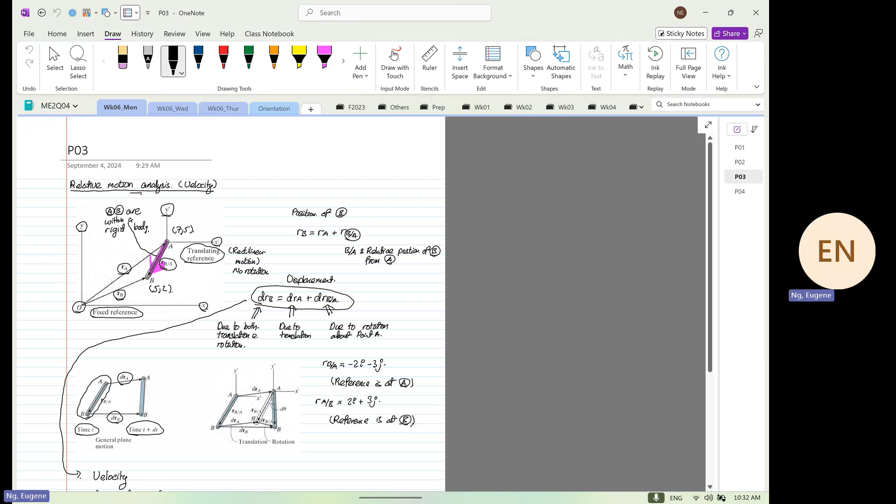So this is week, not for week 6, and on a Wednesday, and we are going to look into relative motion analysis, and we are going to focus on velocity first.

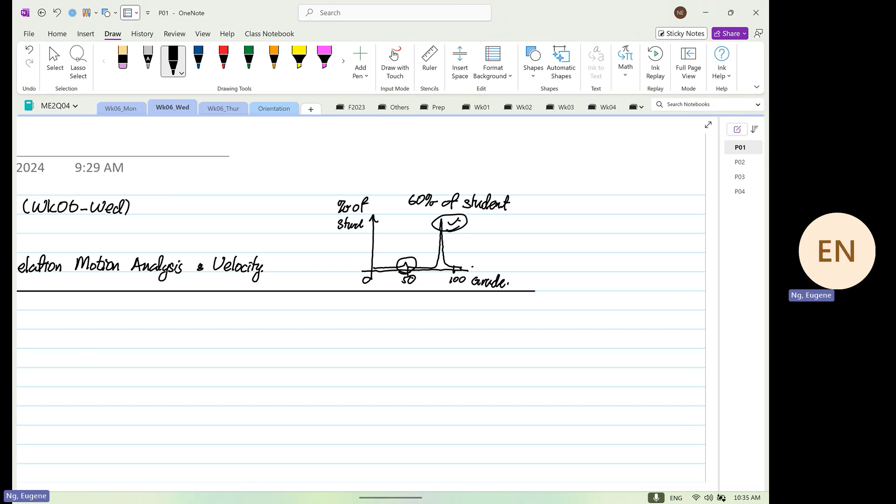Are we clear? Okay, then 3A, you will tend to like me more, or not 3A. Whenever I go outside and walk, I have to look behind my back because 3A has a very high failure rate. Are we clear? Okay, I'm worried. Okay, not worried, but I'm being paid. I'm being paid a good salary to do two things. So I do two things. Anyone? I'm being paid a good salary so that my courses are life-changing and life-shortening. Are we clear? Life-shortening.

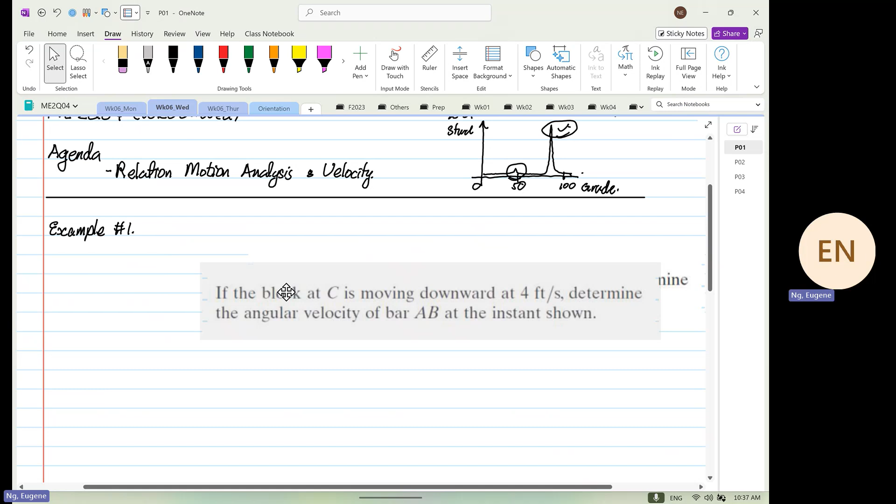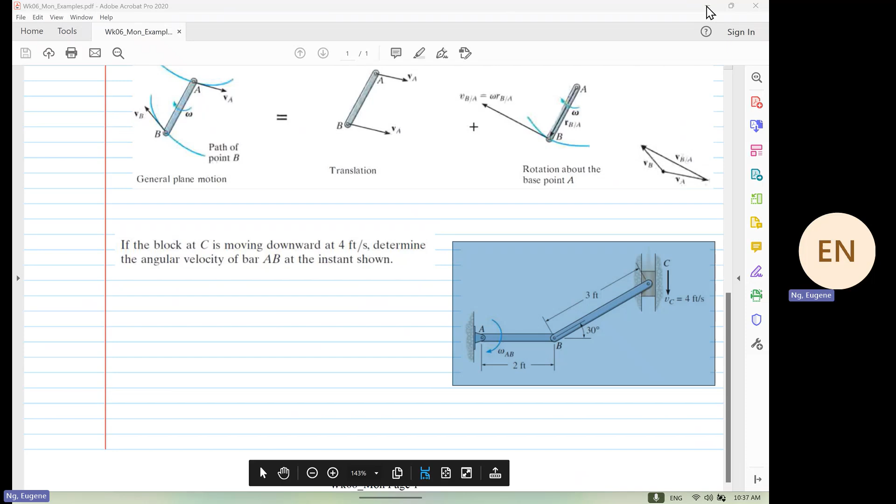And this example will highlight how simple this method is. We are going to start from a simple example first. Then we are going to do something crazy. Okay, I love crazy. How many of you love crazy? You guys are sad like me. But it's good. Crazy, okay?

Right, so you can see over here, if block C is moving downwards at 4 feet per second, we are going to determine the angular velocity of AB at the instant. Okay, so we are going to determine omega AB. Okay, we are going to determine our omega AB.

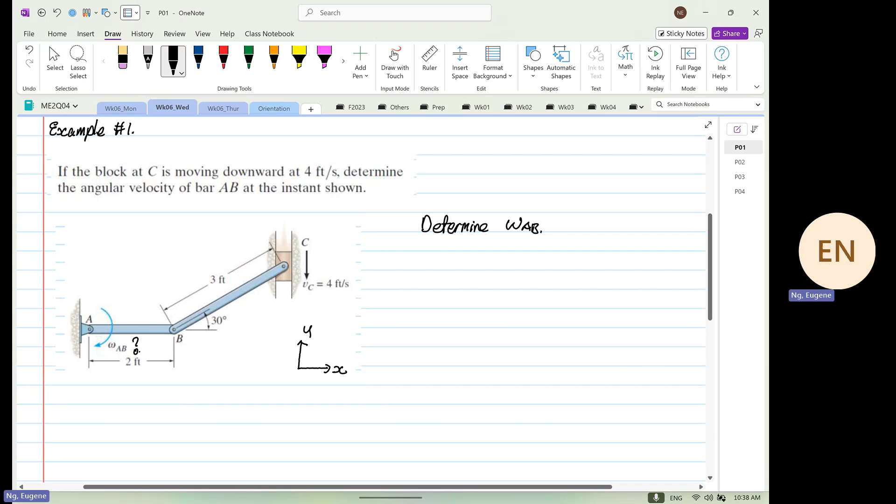Now, as you can see from here, the first thing we do is put in our coordinate system. This is our X and our Y. This is our rotation about Z. So from here, we can also see that there are some boundary conditions. Okay, from this diagram, we can identify boundary conditions. So what are the boundary conditions that we can identify for now?

So the first thing we know is that at point A, velocity at point A is equal to what? 0. Okay, so we have a situation. Why is it 0? Because at point A is in the condition of what? A pin. Okay, so velocity is at 0. Now, then at point C, we can identify another boundary condition. At point C, we know that velocity at point C in the x direction is equal to what? 0 meters or feet per second.

And why is this the case? Because at point C, it is a slider with restricted motion in the x direction.

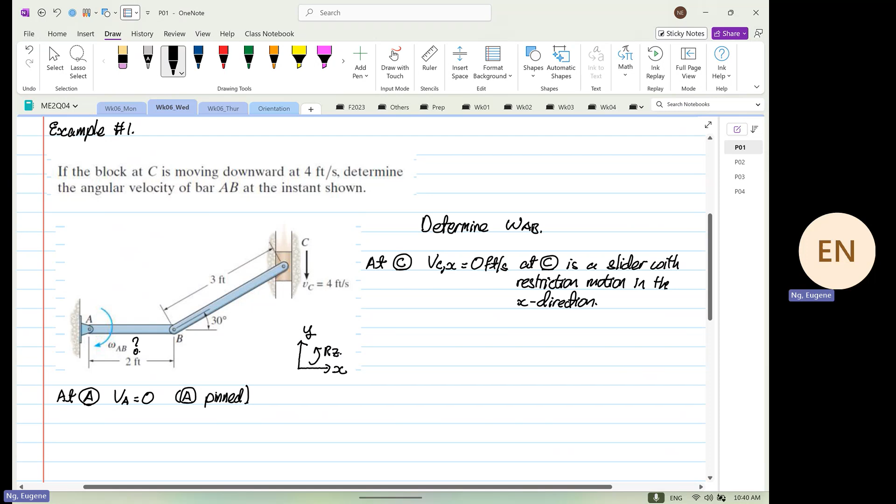So what we are identifying now, what we are doing down here, which is important for this chapter, is we are identifying the boundary conditions. In engineering, whatever subject you do, knowing the boundary condition is important.

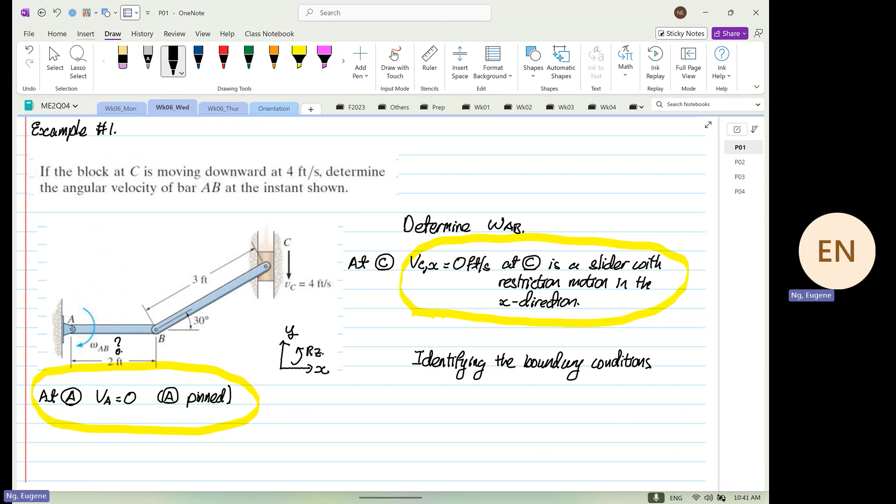Now, one more boundary condition that is not so obvious is this. So if we were to sketch a circle from B to A, hold on, let me try to sketch this circle. Okay, so I'm sketching this circle now. And we know for a fact, this is important, you might miss this: we know that VB will be coming down.

And VB will be coming down just in the... this is not equal to 0. Whereas VBx is equal to 0.

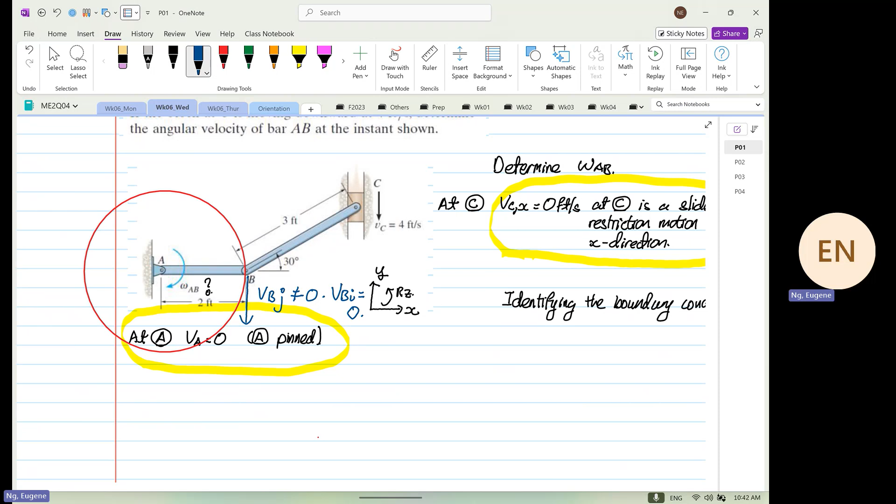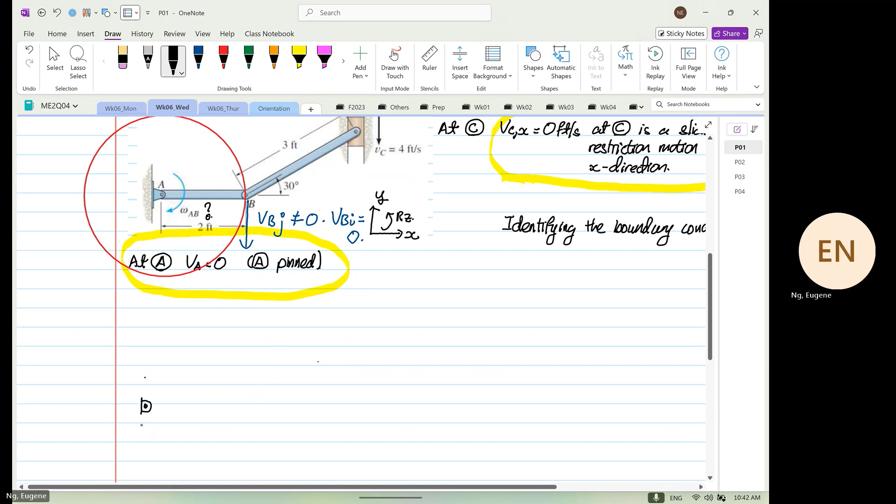Now I want you to hear me out on this, why we make this assumption. It's not just an arbitrary assumption. Now if I draw a similar structure like this: at point A, we have a pin.

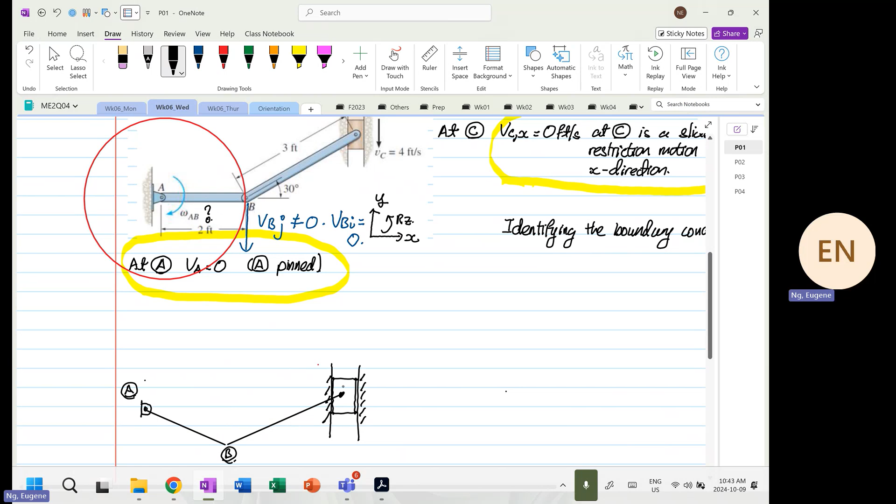And at point C, we have a slider. So this is our slider. As you can see, our slider can come lower, and at this instance we have this. So this is our AB, and this is our BC. So this is our point C over here, right? Like what they have, and it's still the same.

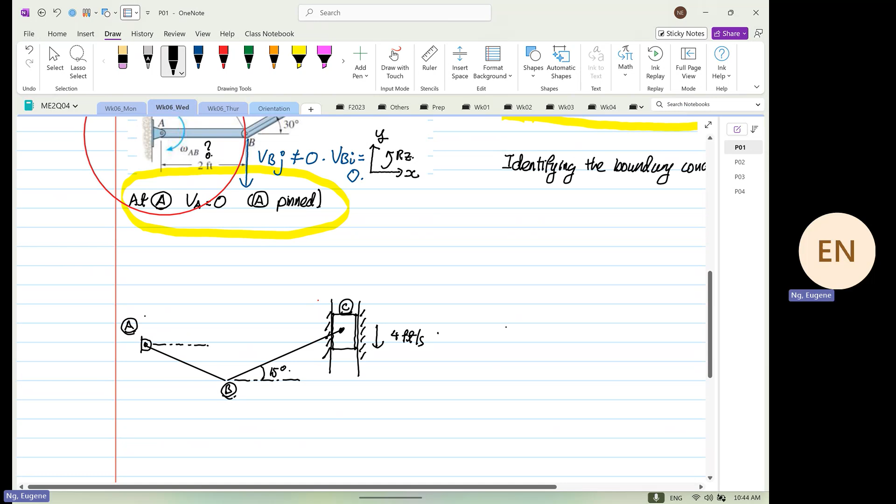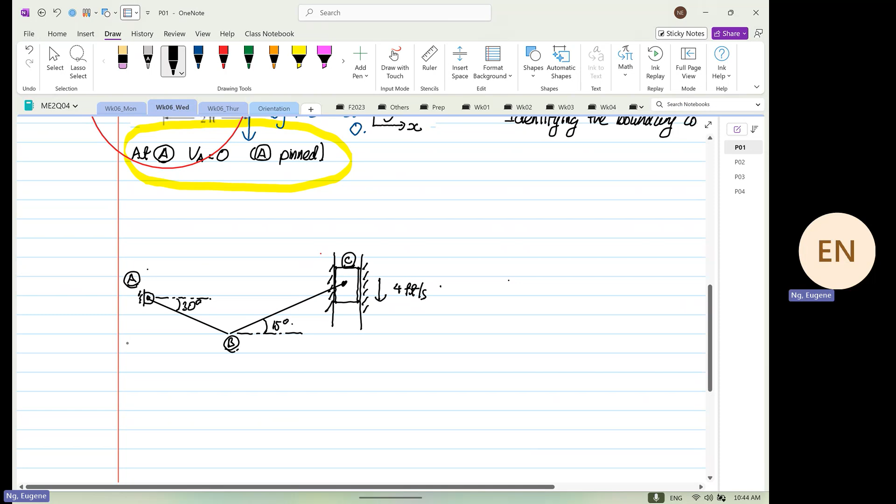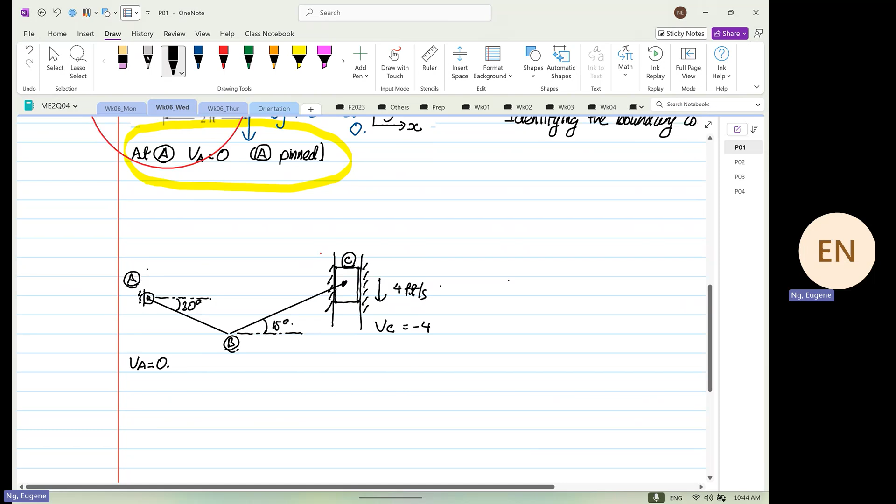This is still coming down at 4 feet per second. Now this angle changes, just arbitrary numbers. This becomes 15 degrees, and again, just arbitrary numbers, this is 30 degrees. So what we realize from here, the boundary condition, this is still valid where the velocity at A is still 0. Velocity at point C is still equal to -4, or in the x direction is equal to 0 feet per second.

However, if we were to draw a circle around this, let me try to center this, okay. So what we realize is that VB now, we have a... this is our VB. When that's the case, our VB will have two components. We have a VBJ, and then we have a VBI. We clear?

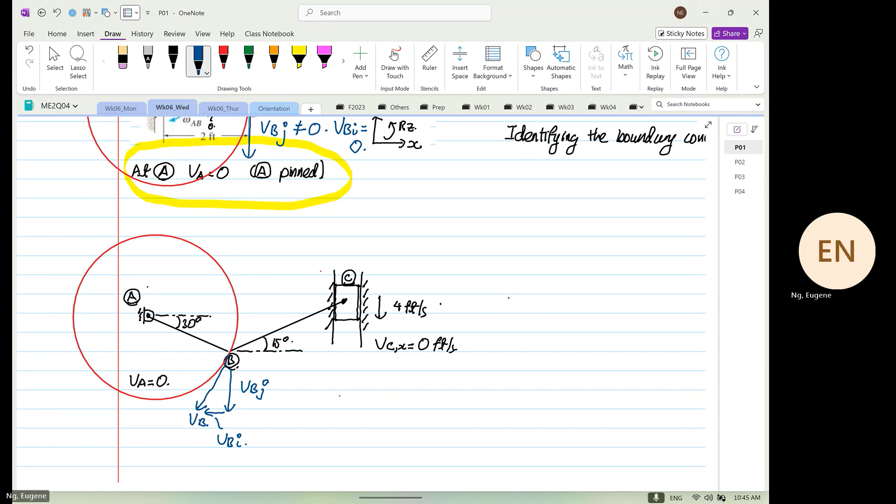You have a J component, and you have an I component. So what I'm trying to highlight is this.

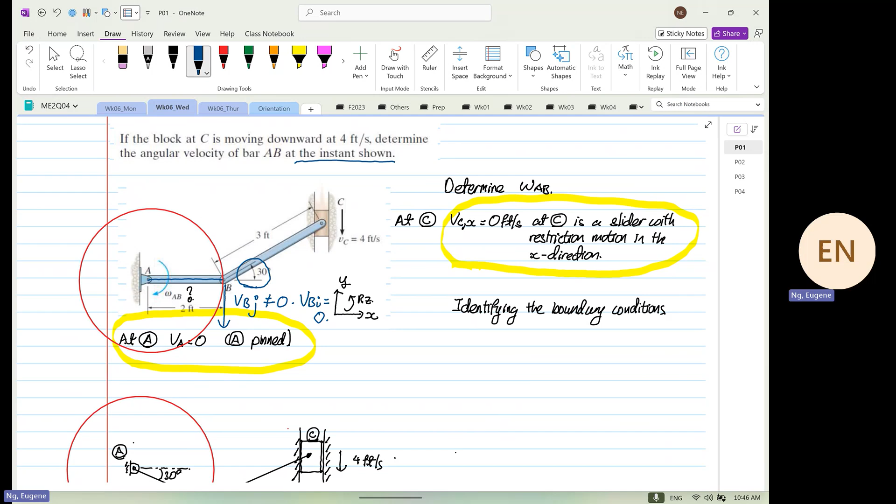The solution that we are providing happens at the instant shown. At the instant shown means when BC is at 30 degrees, and when AB is exactly on 0 degrees, or on the horizontal plane. Are we clear? If it were to shift, then our solution will not be valid. You have to reformulate. Are we clear?

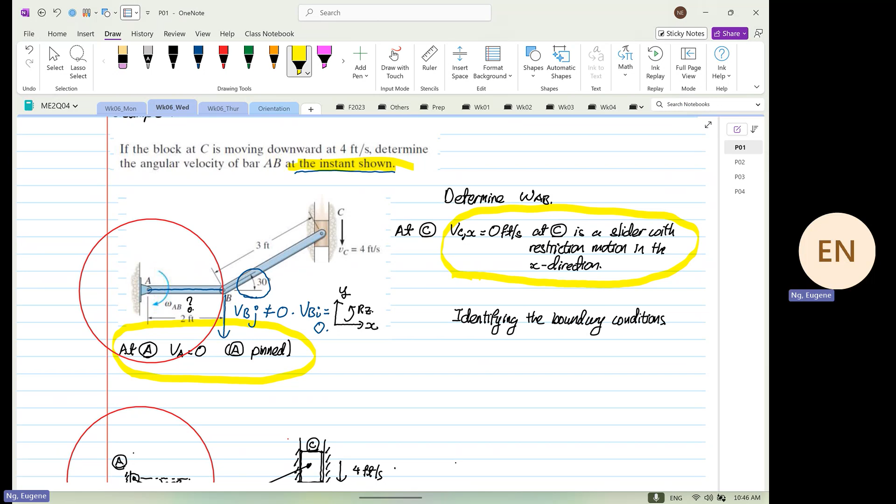So what I'm trying to highlight is at the instant, sure, means at that moment. Be clear. If the angle changes, then this solution that we are writing out will not be valid anymore, because of how we're going to formulate our solution. And I'll show you how we formulate our solution, why it's only valid in this situation.

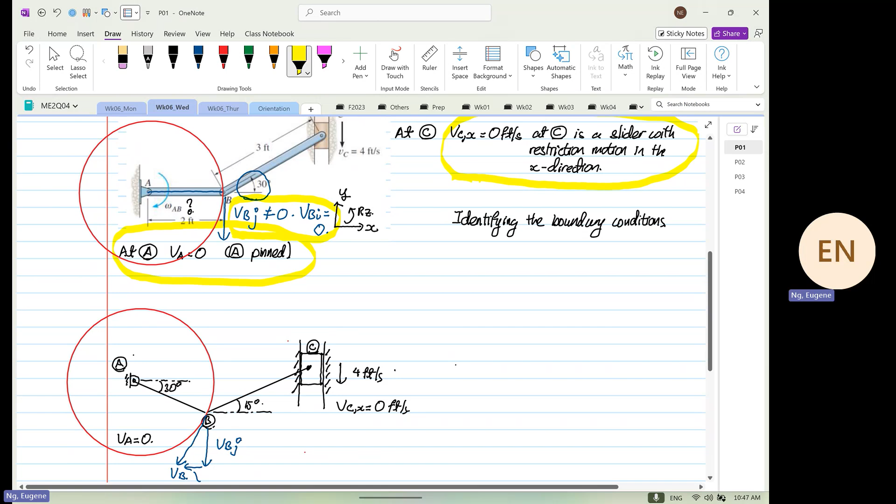One of the reasons is this: we know that VBJ is not equal to 0, but VBI is equal to 0. Over here, we know that VBI and VBJ are not equal to 0.

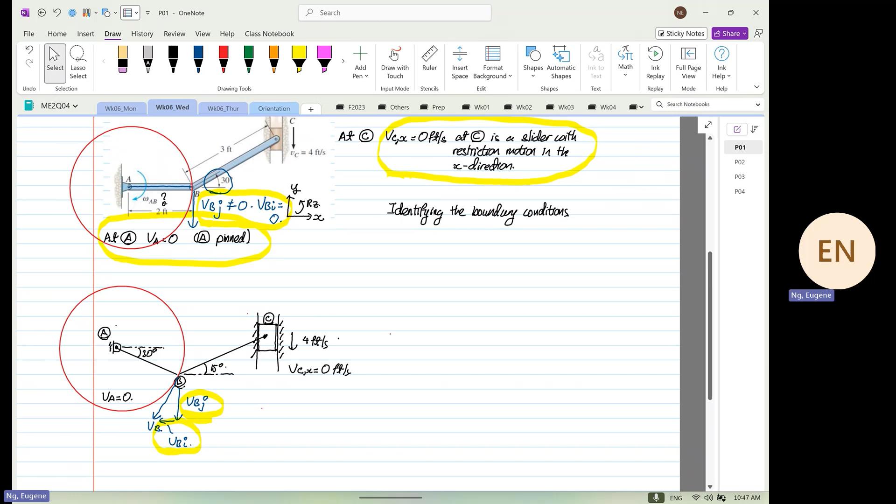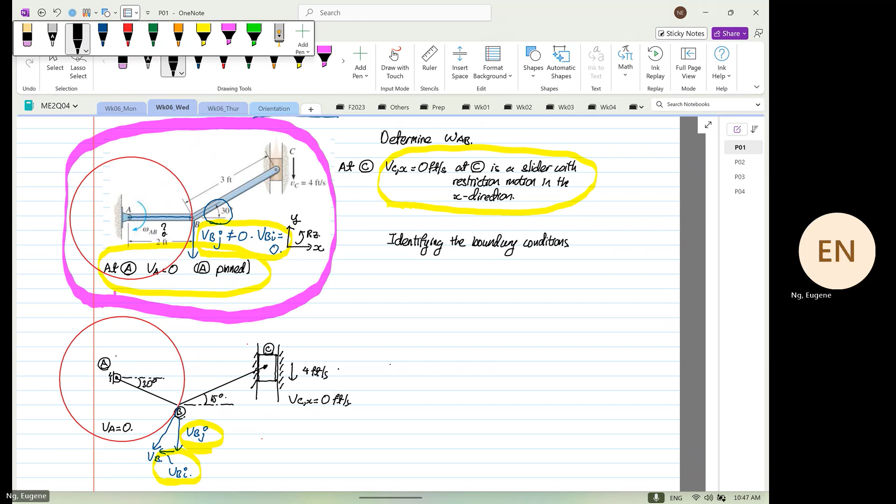Okay, right. So we have identified our boundary condition. The diagram we're going to focus on is this one. So we know that first, after identifying the boundary condition, we have to find...